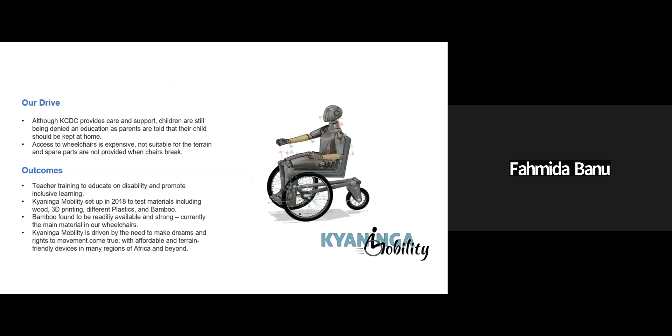But the wheelchair project, we hope to give throughout Uganda. So Kyaninga Mobility was set up, as I said, out of the real need for the equipment—we just couldn't get it. The stuff we got donated from abroad would normally be secondhand, very hard to get children's equipment.

It would quite often not fit, and we couldn't get the spares. So it was all very difficult. These are some of the chairs we've been working on, which I'm going to swap over in a minute, and we can go straight to see the chairs and the testing machines.

But we've tried where we can to get users that we can work with. It's quite difficult, because most of the children we work with have never had a wheelchair—they've spent the whole time on the floor. So we realized we weren't getting much useful feedback, because so many kids are just left on the floor. We've been giving some kids wheelchairs and they're like, yeah, it's the best wheelchair ever, it's brilliant—and you're like, well, probably not. So we've got a lot to work to.

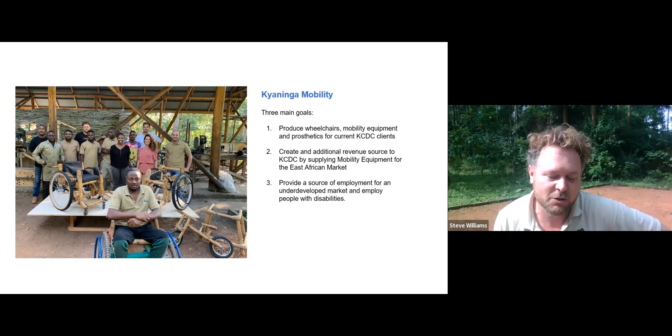So for now we're just moving back. We're going to make a few more adult versions because we've come across a really good network of users who do basketball, and they've got basketball chairs worth sort of $10,000—really good chairs. So it'd be good to compare ours to that standard. They're going to be coming down each month, we're going to put a competition on and use our chairs for the actual event, but also test all chairs with that network.

In the picture, there's actually one of our guys, Rogers. He lost the use of his legs through a disease he got in his spine, but he wanted to be a ballroom dancer again. So that was another great opportunity to have a user—it was really key to get the center of gravity perfect, all the spins, the durability. He's been a really good help.

We're working on, at the moment, trying to keep it just to 3 wheelchairs: a standard wheelchair, the ballroom dancing wheelchair—although I think they're looking at starting a Ugandan ballroom dancing team now—but it's the standard wheelchairs we really want to work on, and then develop until we have a range of around 10 or 12 wheelchairs. All of it is, we just want to keep developing. That's why we want to make them in country and not send them off to China. So we'd love to be able to make batch production here.

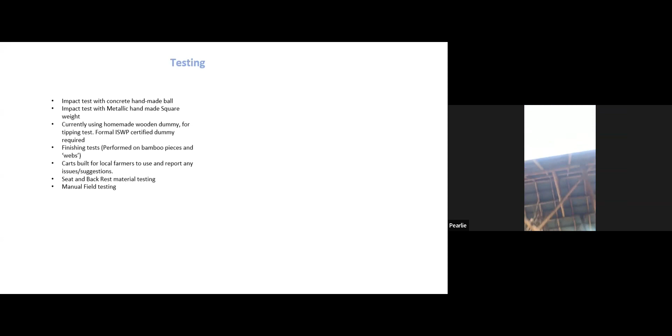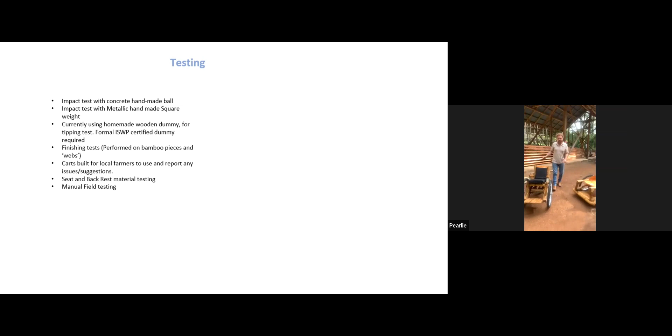Okay, can you hear us okay if I move back this far away? Yep, I can hear you.

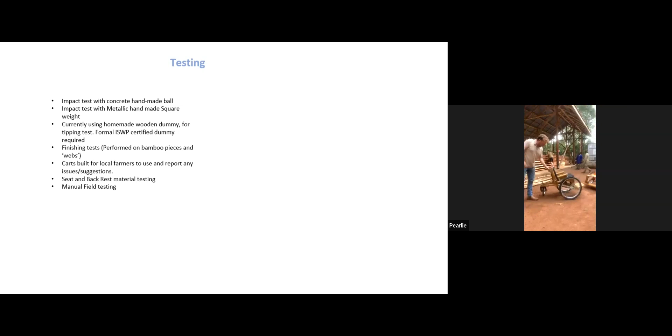Okay, great, so this is one of the chairs. This is more of the standard chair, but with a trike. As you can see, we're butchering all the chairs all the time.

We can actually move the caster wheels backs and forwards, and we can move the back wheels. We're trying to find the best center of gravity so it doesn't tip.

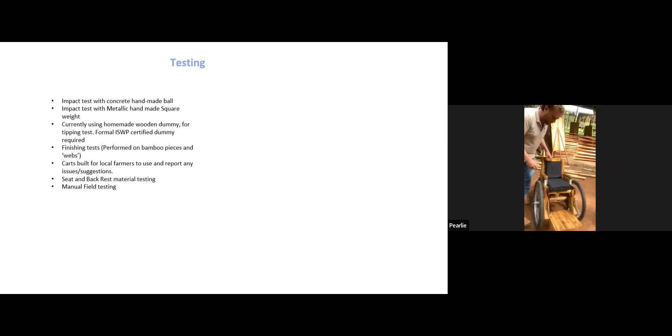This is for a child. Why is this so high up? It's for a particular child that had a very high waist. We've tried different strapping. I guess that's the problem throughout Africa.

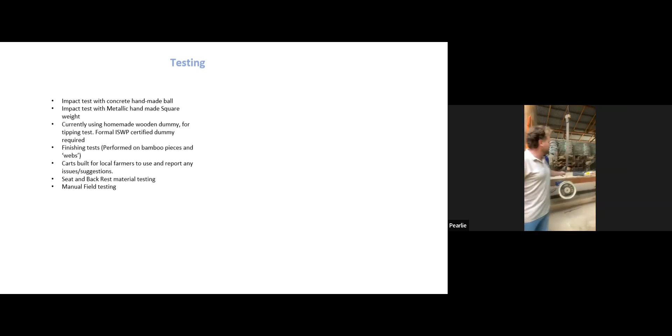We've tried all the different strapping, and to be honest, nothing works. We have it over here, where we leave it, and every week we measure the distance. Apart from, we've moved back now to seatbelt strapping.

The rest just keeps giving, basically one centimeter every week. All the strapping we can buy is given, so it becomes very, very saggy.

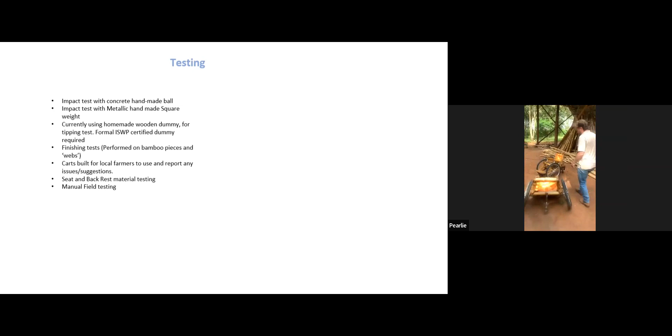This is the sports wheelchair. This is version 3 of this one. So...

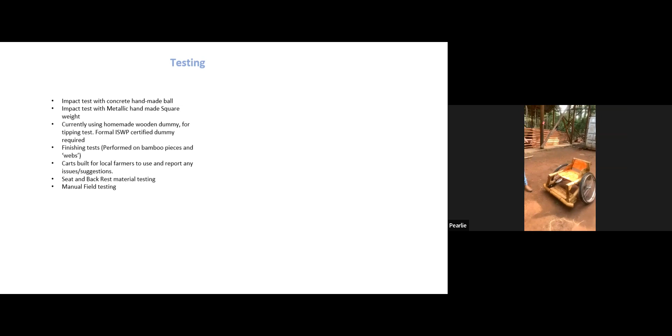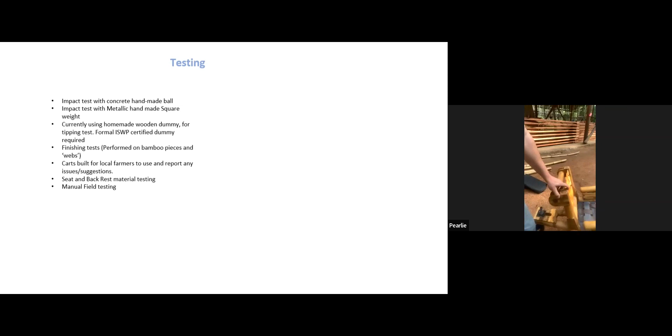Many things are changing, but essentially what we're very excited with these chairs is that the bamboo is incredibly cheap, and we found a way to fix the bamboo. That has been our mission really from the start, was how can we fix bamboo very cheaply.

We tried 3D printing for a year. We tried, obviously, metal brackets, but they were too heavy. We tried other plastics to join them. What we've done is we've created a machine to fill the bamboo with more bamboo.

And then a machine that shapes the core to go in, and then we can use traditional woodworking joints. So now we can do more like simple miters with the webbing. And that side of it seems to be going really well.

So we've done quite a bit of testing on dropping it, so if we can now start the real nitty gritty of getting, as I said, the center of gravity and everything else correct, we feel we can make much quicker progress. Should we have a quick look at some of the testing machines?

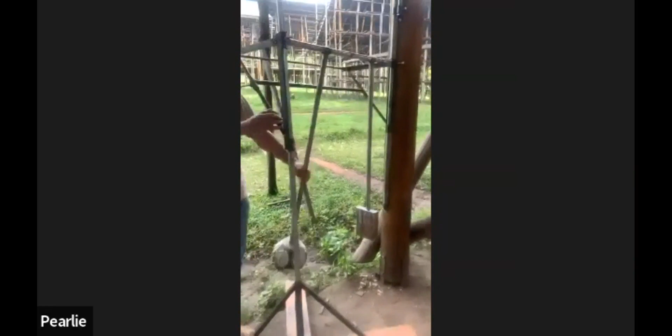So the two you've seen are probably going to get broken quite soon. We've set up so that we can, hopefully following Dr. Pearlman's approach, do the actual seat itself.

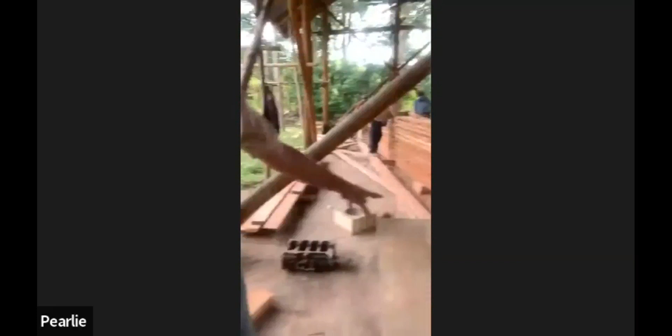Same with this one. These are all correct weights done from the ISO test that we got. This is for tipping, so there's a hoist that tips.

The trike obviously is the one that we're really worried about, getting the wheels so it doesn't tip sideways. This is our dummy. We put weights in, which we were given the design for, so that we can hopefully share data.

We then do trailer tests. So we take trailers that we fit on the back of the vehicles and then take them around town, so that we can basically, all the technology is the same as what we use for the wheelchairs and the walkers.

But we can see then how long the hubs last, how long the joints, the sprockets, the bearings last, so that everything gets a good test.

We've now given similar ones to guys in the village to use to take bananas and crops to market. We thought that was a really good bit of local testing, going over all the local potholes, getting it to market, unloading it. I think that's all the testing.

So what we wanted to ask was, what other tests should we be looking at? Should we be building something that we can sort of do in this country without importing very expensive machines?

Right. Does someone in the group have any insights for Steve?

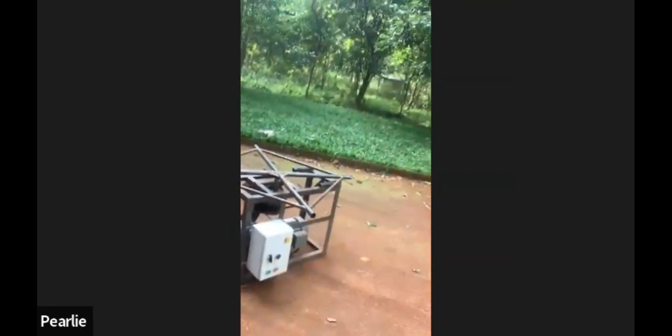I forgot to show you briefly, we have a carousel so we can pull wheelchairs around and around. We're going to make a course for it now. We just leave that running all day the workshop's running, and we'll clock its kilometers. So that was the one more machine.

Sorry to interrupt, do you have any plans for a fatigue test, like a drum test? How does that work? A fatigue test, like the drum test? Oh okay, we were looking at the drum test to test the casters.

Is there a drawing of that we can use to build it? There is, it's in the standard. Stephanie, I can get it to you if you can get it to Steve. Yeah, that would be great, thank you.

There have been alternatives to that. Usually the drums are steel, but I've seen some modifications where you can use a piece of plastic pipe and fill it with, I've seen some filled with concrete, some filled with dirt, just to get the inertia right on the drum.

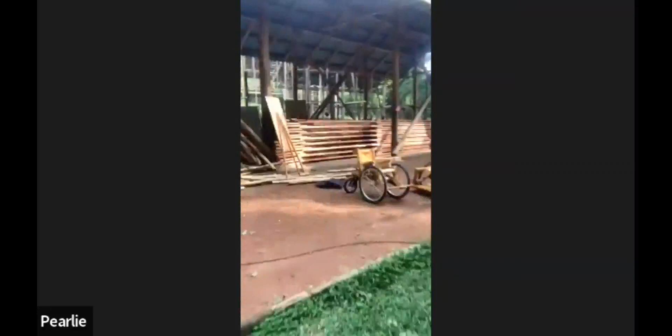Basically, a bike mechanic could repair everything. That's why we're really keen for the main structure to not break. That's why we're almost oversizing our components—let me just turn you around—we're oversizing the bamboo really, so these joints never break. This has to last for the life of the wheelchair.

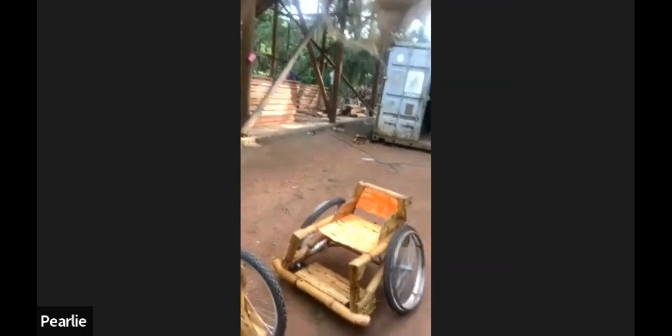And are you using some kind of covers, maybe with some type of fabric, to protect sharp edges for the user?

Like for the bamboo, it's all very soft, but we were thinking we're going to need some more guards on some of them. What we've really struggled with is getting 100% cotton - we're not going to be able to. At the moment we've been looking at buying even t-shirts. There's a lot of secondhand, I know it's not ideal, but a lot of secondhand t-shirts that are still in very good condition, 100% cotton, that might be a source, but we can't seem to find anybody supplying 100% cotton, which we need to stop anybody getting bed sores.

As part of the WHO basic training, when they do the cushion in low resource settings, what they tend to do is the fabric that's going to go on the cover of the cushion itself tends to be like active shirts - sports shirts. That's the kind of material they use with some cushioning inside, because that's going to be soft to the skin and allow them to breathe. I'm not a cushion expert, but that's what I know is being done in less resource settings. There may be other people on the call who can provide more feedback on what materials could be used for that - if someone knows more, please feel free to jump in.

One of our plans was, if we can get it comfortable with the strapping, to keep the foam as thin as possible but still comfortable, if we can get high enough density foam, which is very difficult. There's only 25 - what's the rating for foam? ILD. So we're trying to see if the manufacturers will go up to like the 75. We've asked many but haven't got positive feedback. So if we could go with thinner foam, we could put some behind the back seats and have at least one or two changeovers, so if they get wet they don't leave them damp - they change them over, then wash them in the evening and put them out to dry.

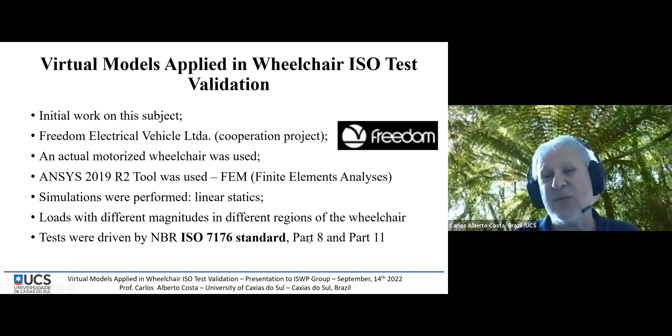I'll explain later. Loads of different magnitudes were applied, and we specifically used ISO 7176, part 8, for specific parts of the test. This was an initial test we did. We took the full geometry model of the wheelchair, turned it into a simplified model, and then a final model which we used to analyze.

It's important to say we removed all components that don't make a difference structurally. For example, we have the control here, so we didn't use this in the test, only the main frame of the wheelchair.

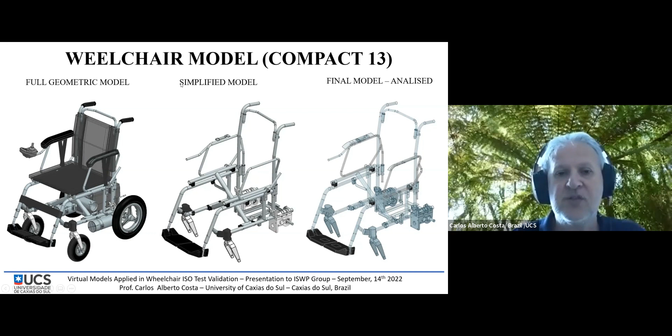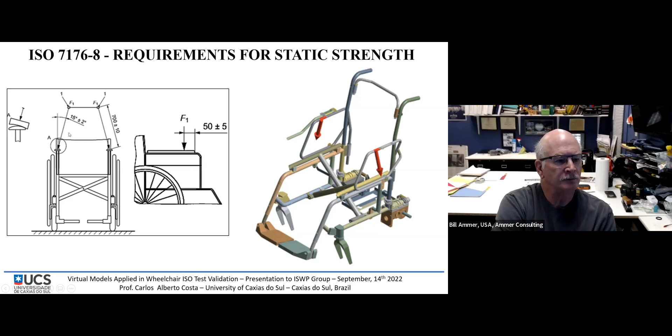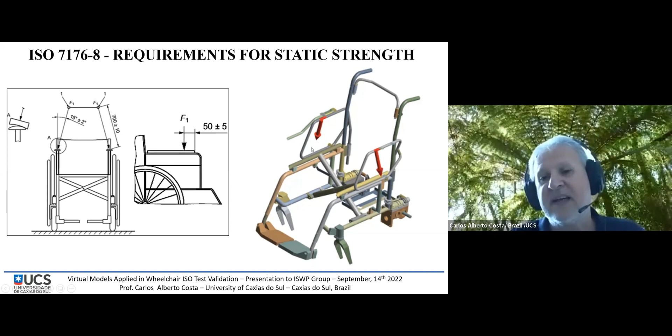We tested 3 situations. The first was about the armrests, where we applied the loads specifically as the standard says. Here on the right side we have the virtual model. We also tested the footrests, applying the force there too. In this last one, the standard talks about the adherence of the handles, but in this case we tested how the wheelchair structure behaves when pulling the wheelchair up to the sidewalk, and how the structure responds to that. So we didn't actually check the adherence of the handles.

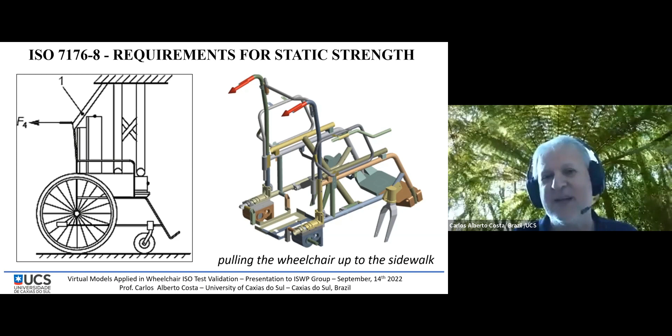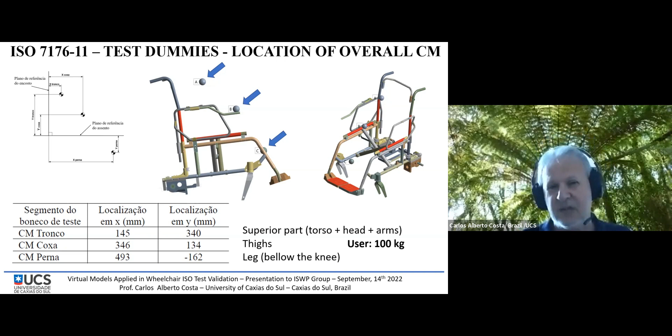To do the test, we also considered part 11, which states about the dummies. We considered the center mass of the superior part of the body, then the thighs, and below the knees, the whole leg. So we considered a user of 100 kilos to do the test. The wheelchair is about 120 kilos, but we considered 100 kilos and made all the calculations with this.

So after doing the finite element mesh, we made all the connections. Here comes one important thing: how we design in the virtual model the connections of the wheelchair parts, like welded connections, bolted connections, the tolerance, the clearance. We have to keep in mind that the virtual model is quite, let's say, perfect. So when you test a wheelchair in real equipment and put a load or force at one specific point, the wheelchair absorbs this force in another part of the structure.

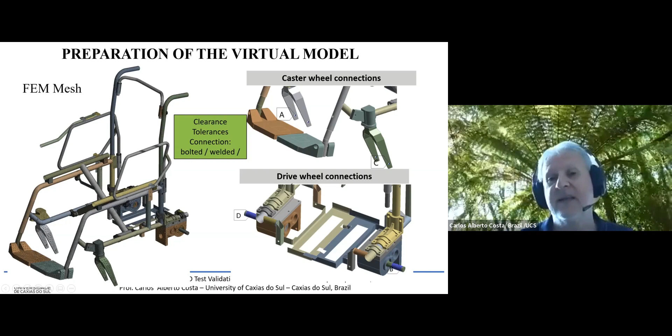But when you do this in a finite element analysis model, it's quite specific, so it considers that the rest of the wheelchair stays rigid. So this part is important to keep in mind, because eventually you can get a different result. So we have all the connections, the caster wheel, the drive wheel, how we fixed the model.

And then presenting the conditions. So the first condition, just to show: we consider the user seated, and all the weight of the seater is distributed by these two bars, where the actual seat is.

For this wheelchair, it is manufactured with steel SAE 1008, cold rolled. And from this we took the tensile strength out. This is the part where I told you we have considered only this part of the material property. We call this part elastic.

So we didn't put the second part in the software, which is the plastic part, where the actual deformation of the material occurs. We call this the plastic part. So we had to put in a hyper-elastic part, which is a little more complex. And all the data is in megapascal.

There is a mistake here, it's a capital P. So for the user seated, it's quite easy. All the maximum tensile values in the distribution of the wheelchair, no big deal about this.

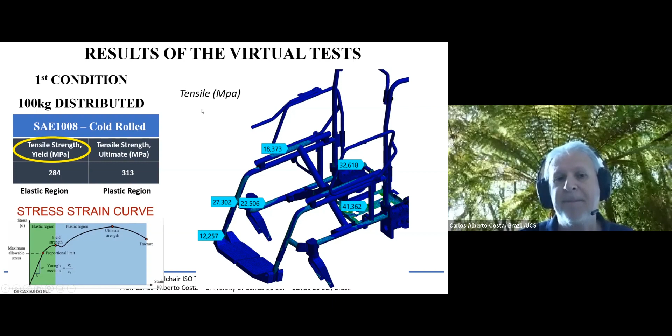The third condition: we put the loads on the footrest. At first the results seemed quite strange. But then the manufacturer told us they are using two different materials here.

The SAE 1008 cold rolled in the superior part, and the inferior part was another SAE 1008, drawn, which changed the property values. So in this case we saw that it was quite critical.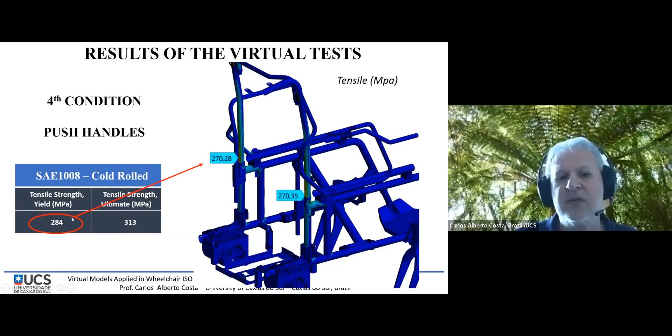In order to check some of these results - because okay, I have a virtual model, does it make sense or not - we exchanged a lot of information with the manufacturer, because they had tested this wheelchair at an official test center, but they didn't get results by numbers, only pass or no pass in the test.

So we put some instruments here, and we used a strain gauge to get the values of the deformation and the tension. And we did a test with some calibrated loads.

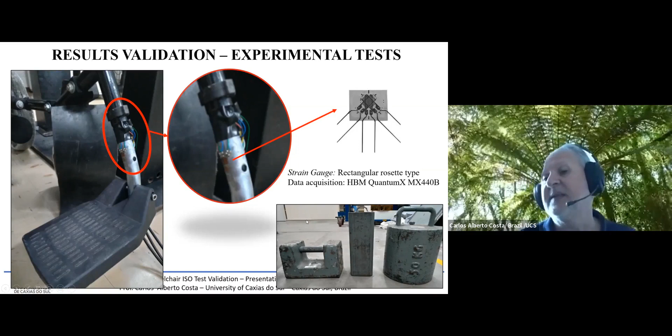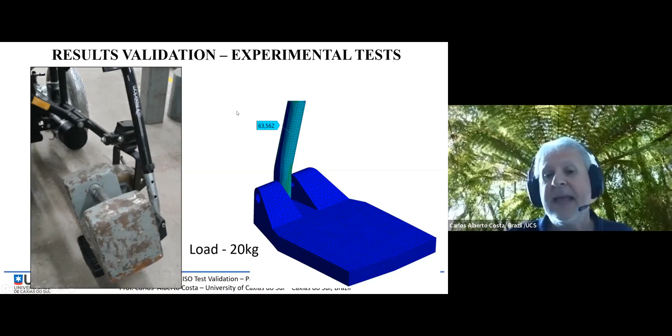So we used here, but of course we put a little thing that doesn't appear here to simulate exactly the same condition that the standard says, and the same that we used in the virtual model. So for 20 kilos, for example, we got 63 megapascal.

Tensile. And then we did a comparison with the experimental tests and the virtual tests and got some results of the deviation, which is not bad when we consider this is the first model, considering a little of things that were not perfectly informed to us.

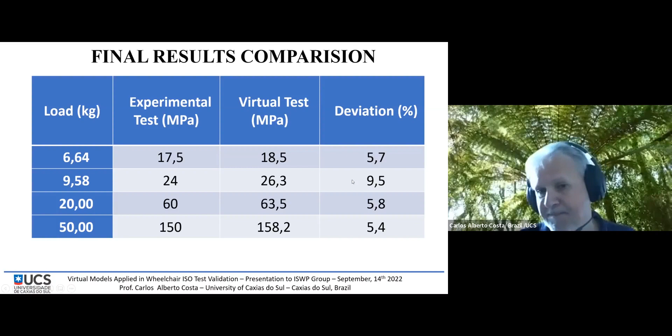But anyway, when you have a deviation about 10%, I'm not saying that's okay, but it's quite good for a general model. So we tested this, and just concluding this first work that we have done, it's a good and reliable solution. It's not bad. In fact, we have an idea like in the automotive industry, we can test physically and calibrate the virtual model for some sections of the wheelchair. And then when you change some part of the wheelchair, there is no need to test all the wheelchair again. You can only adapt that part in the model and see how it behaves.

So the main issues related to the material specifications, this is one part where we have a problem: what exactly is the specification of the material? What exactly are the mechanical properties? We were not convinced about the mechanical properties, so we asked the manufacturer if they could make some destruction tests on one part of the wheelchair. We took it apart and made a traction test, an elongation test, to see if the tensile strength was the same that the manufacturer was telling us. So you have to prove if it was. It was okay, the difference was about 10 megapascal. It was okay. But also we can extend these to other physical tests: tensile, impact, fatigue tests. And this is the information that you can input into the virtual model and try to simulate other situations.

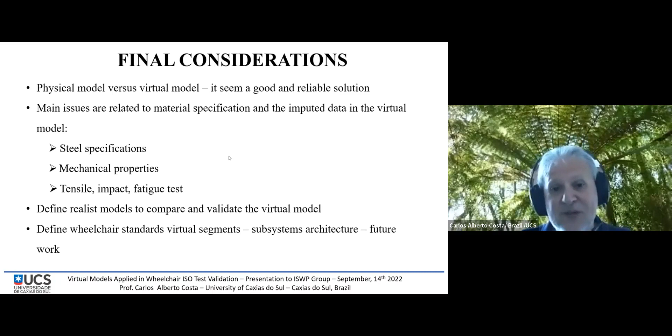This part of the realistic models is the main issue, in my opinion. We have to always, although I'm doing a virtual test, check and calibrate the model. So I cannot just do the virtual model and say that's correct. But as the tests are done, we are getting some confidence in the virtual model, so you don't need to do all the physical tests again. And as I told you, one idea we have is creating an architecture that defines subsystems of the wheelchair. And once you have the confirmation that this part is okay, you don't need to always test the whole wheelchair again. You only test the parts that you are changing in that configuration, because the other ones are already, let's say, tested and validated. So the work, sorry for my English, but the work in essence is this.

It's quite different from what the group has been presenting, but I'm ready to listen to some considerations or questions to try to answer.

Carlos, how long did it take you to do the actual modeling of the wheelchair?

It was easy for us, because, let me explain why. We received the full geometric model, the virtual model from the company, because the company has to design the product, so they have all the details designed. So we received that. Our main work was to take parts we were not considering for the test, and mainly work on the joints, how to configure the joints, because you have to be very specific on this, otherwise you can get big errors in the model. But to be more objective, this student took this work, decided to do it, and did it in about two and a half months. He knows about finite element analysis, he's an engineer from this area.

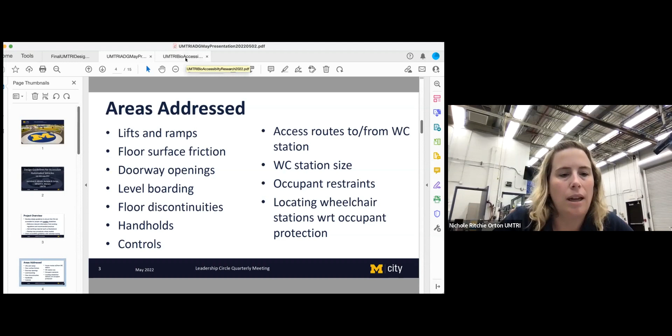A report on that's coming out soon through M-City. We're also developing a side impact procedure through NHTSA's funding - that's the National Highway Traffic Safety Administration. But the bread and butter of what we do every day is testing frontal impact for different types of products.

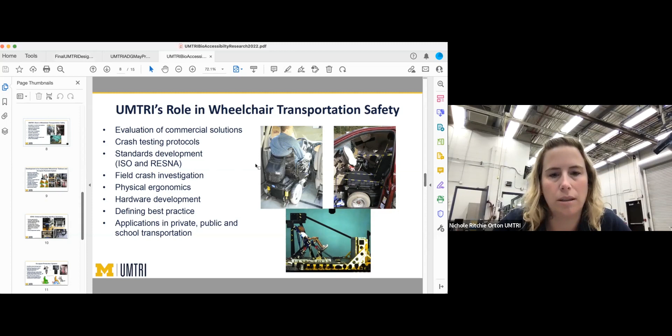Let me switch my share real quick and go to this. Miriam Manary, myself, and Kathy Klinich are all the main researchers in this area. Miriam and myself are both involved in the RESNA Committee on Wheelchairs and Transportation, or COWHAT, and the sister committee in ISO, ISO WG6, which develops standards related to using your wheelchair inside a vehicle, as a seat inside a motor vehicle.

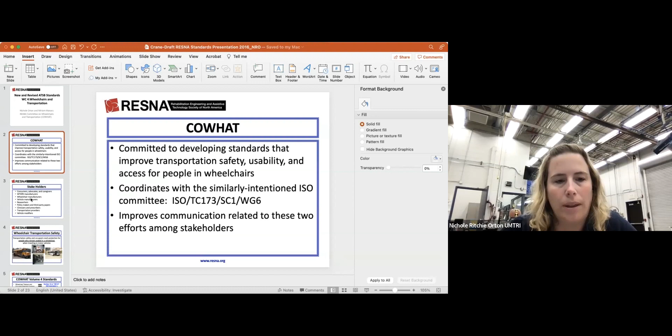These groups are made up of engineers like myself, consumers, advocates, caregivers, manufacturers of the different products - like the tie downs and occupant restraint systems, the wheelchairs themselves, the seating, vehicle manufacturers, and clinicians. We even had some policymakers provide input, like from FDA.

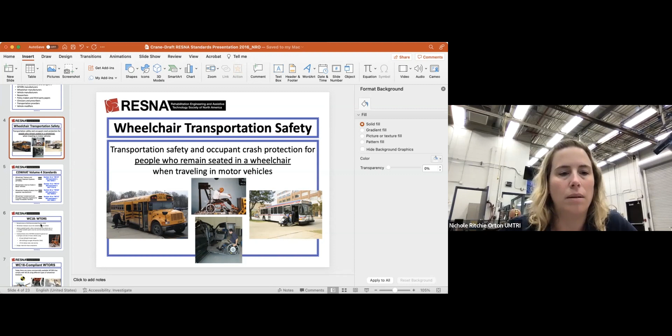Our main concern is to look at crash protection for people who must remain seated in their wheelchair, and make sure that they're achieving at least the same level of safety as a person seated in the manufacturer vehicle seat. So the standards at play in this arena are related to these products.

We've got WTORS, which are the tie downs and occupant restraint systems. So we've got WC18 here in the US as a RESNA standard, and the ISO world equivalent is 10542-1. There are some differences, but we do try to harmonize as much as possible.

Then for the wheelchairs themselves, to make sure the wheelchair is crash worthy, we have WC19, which is part 19, as Jim was mentioning earlier, 7176 part 19. And then for the seating systems that we want to test independently of a wheelchair frame, we're able to test using the methods in WC20 or ISO 16840-4.

The last category is for a low G environment, or a large accessible vehicle environment, where we're looking more at a containment system as opposed to a restraining system - for big buses and things where you're not going to have as high forces. That's section WC10 for RESNA, or 10865-1 in the ISO arena.

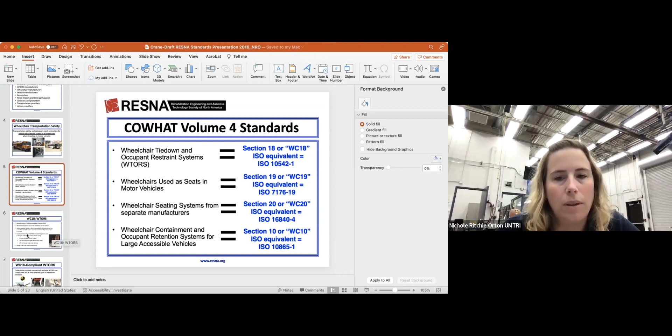So I'm going to show you some of the things we do for the top three mainly here. For WC18, that's where we're testing tie down systems and occupant restraint systems. The standard includes many things, like labeling considerations and design requirements - it's got a bunch of design requirements for the tie downs and the occupant restraints.

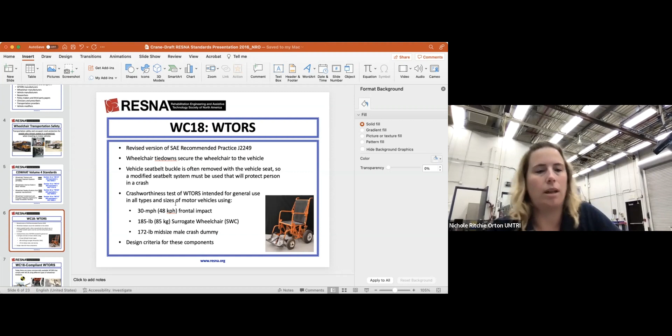But then in Annex A, it's got the crash test, which is a 30 mile per hour or 48 kph frontal impact, where we use a surrogate wheelchair that's 85 kilograms and typically a mid-sized male Hybrid III crash dummy. I can come over here and show you - I think Jim showed some of these as well when he did his presentation, but this is our surrogate wheelchair.

So it's basically just a rigid reusable tool so that we can test our different tie downs. We can do both docking type systems or strap type tie downs, because we've got securement points here.

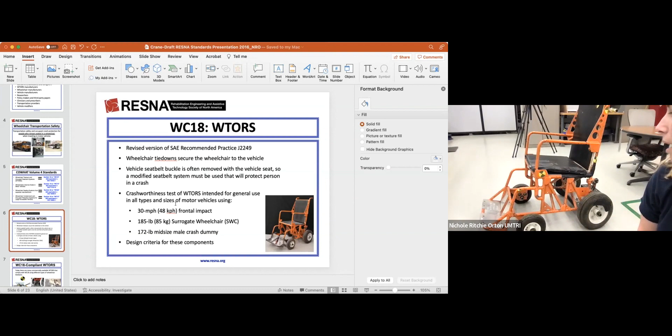We can test with a belt anchored right to the wheelchair, or with systems that come with belts anchored to the floor. WC18 actually requires, if you have a kit for general use that includes an occupant restraint system anchored to the floor, there's a second test now required, because WC19 wheelchairs are in the market, which can have integrated seat belts attached to the wheelchair, so all the restraint forces are attached to the wheelchair. So the second test of the tie downs would include the wheelchair, with a surrogate lap belt anchored to the wheelchair, just to see how the tie downs can handle those forces.

Does anybody have questions? No. Okay, so then let's see what else.

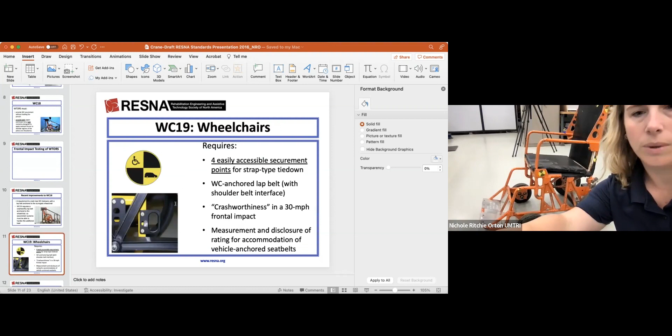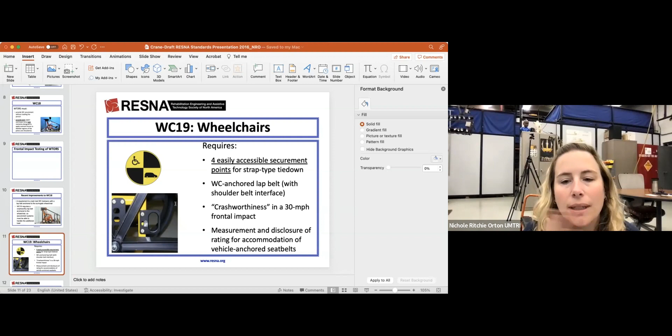So WC19 is where we're doing our testing on the actual wheelchairs that are meant to be used as a seat in a motor vehicle. For those, it's a similar test: a 30 mile per hour frontal impact on our sled here.

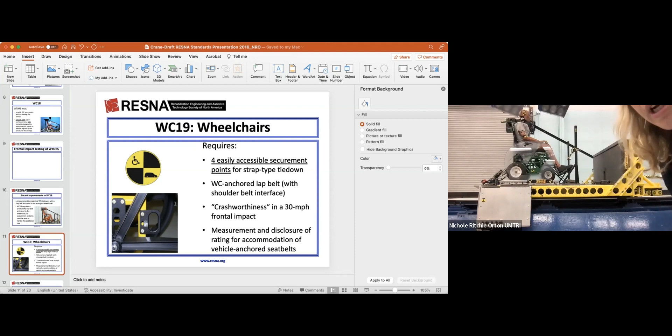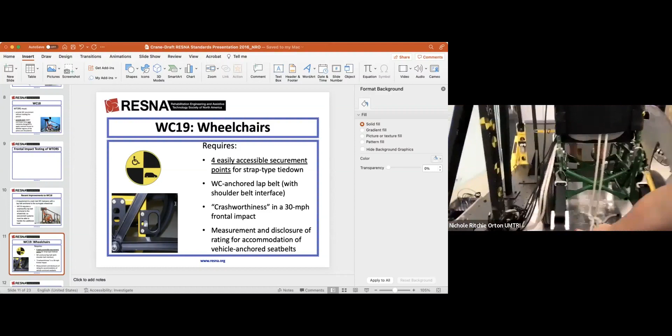For that, we are strapping down the wheelchair with our surrogate tie down system. For WC19, we have a very prescribed set of surrogate tie downs made of reusable components, so we can replace webbing and things like that. We've got a strain gauged anchorage here, rod end at the bottom, so we can measure the forces on the rear tie downs. For each test, we replace the webbing. We've got these split drums that enable us to fix the tie down at a specific length, and reusable hooks for ours. The ISO standard part 19 will allow you to use commercial tie downs for this, as long as they are crash worthy as well.

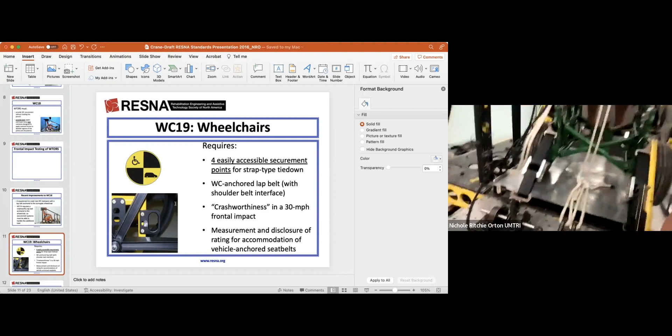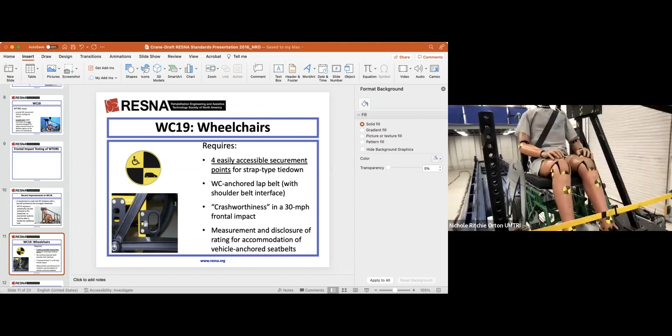But this is what we use, and we typically also use a surrogate shoulder belt paired with a commercial wheelchair anchored lap belt. And we have this knee leg stopper here to keep the knees from hyperextending during the crash, which is in both standards now.

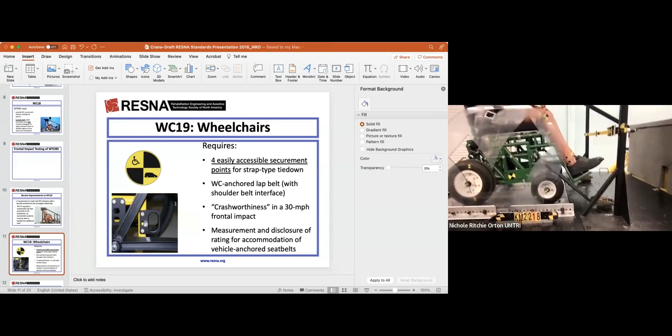When we do these tests, we're looking for things like how far forward does the wheelchair and the occupant move, and the structural integrity of the wheelchair itself. Do we have any major breaks in the frame? Does anything break off and go flying? Because there's limits on those things. Whether or not anything breaks and creates a sharp edge that the occupant can contact, and so on.

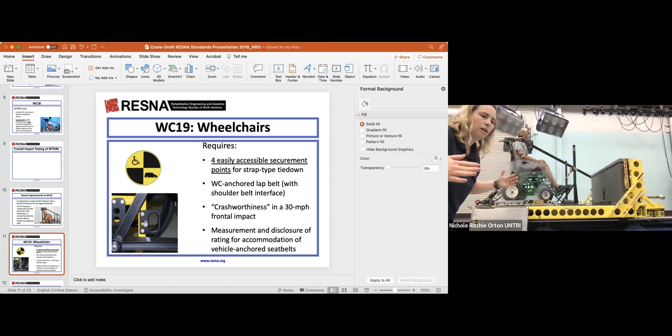We also have this little zone here, this plexiglass zone, that's in the standard. We're requiring that wheelchairs have their securement points within this check mark zone, which is a zone we developed based on the minimum and maximum reaches of different tie down lengths for a strap type tie down. So we want to make sure that any securement points on the wheelchair are reachable by a typical set of tie downs, and that they can tension properly.

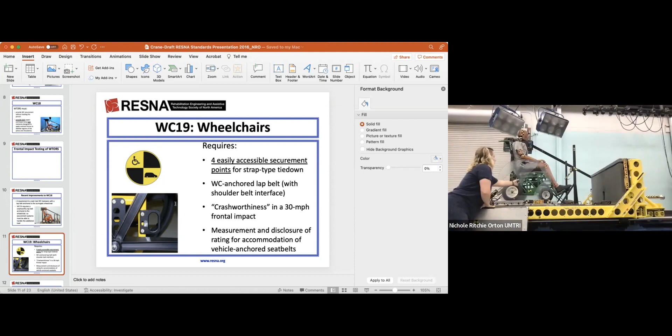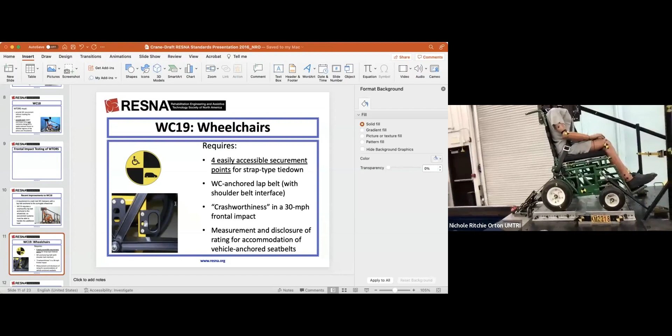So then for WC20, where we're doing the seating systems that are independent from a frame, we use this chair here. This is the green, our surrogate wheelchair frame. It's a rigid frame that we validated against several commercial frames to provide a worst case loading situation to the seating system and its hardware.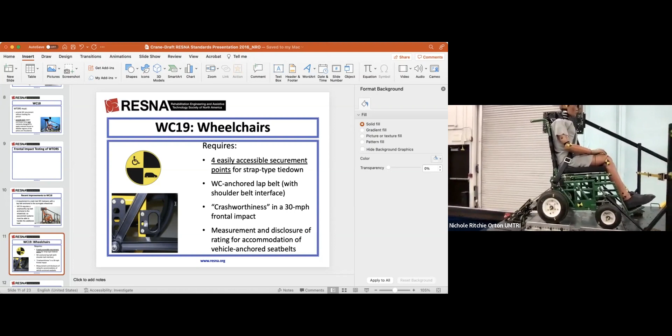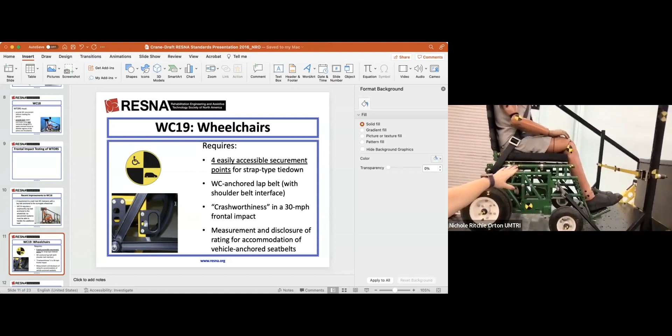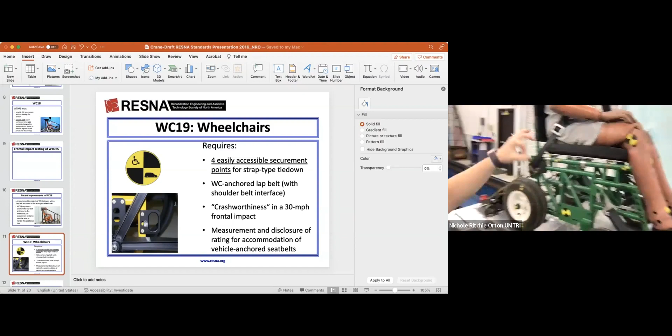So it's tested with the surrogate tie downs as well, and then we use a commercial seating system and their own attachment methods. This frame can be at different widths. We've got different cross members that can create different widths of wheelchair for the frame, and different seat rail dimensions. So if we need a wider or a square tube instead of a circular tube, or a larger diameter tube, we can swap those out. We don't typically do that because most of the seating systems can fit on a 1-inch diameter rail like this.

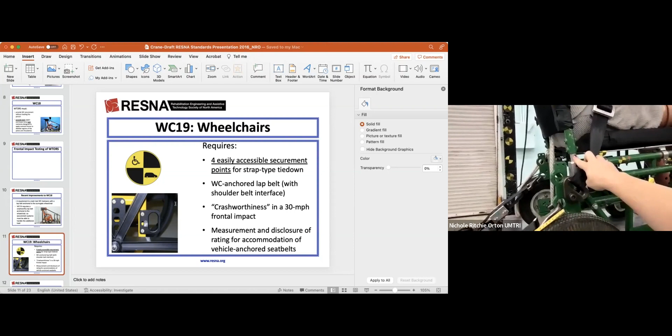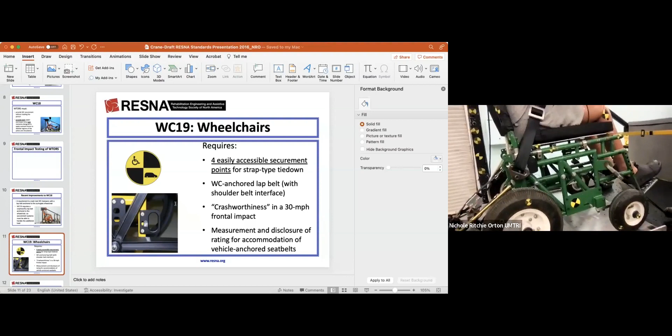We have deformable elements on this. We've got this aluminum caster attachment here - I don't know if you guys can see it, but you can kind of see it on the other one. These deform with each test to manage some of the energy and make it more similar to a frame with its deformation, so it's not just such a hard, rigid system. We also have deformable aluminum elements for the seat back canes here that will bend and give some, because we know most wheelchair seat back canes will give some for a real wheelchair. But these are a controlled and repeatable way of managing energy in a realistic way for this crash as well, which is also 30 miles per hour.

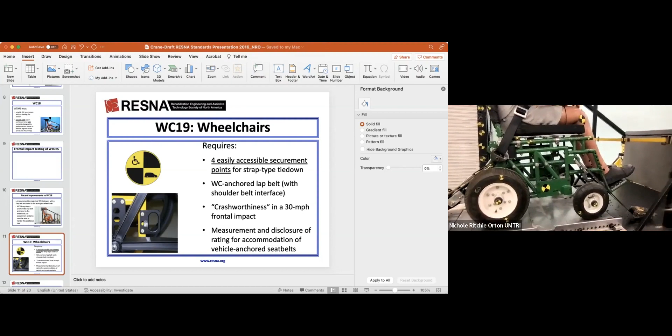Let's see what else. Does anybody have questions so far?

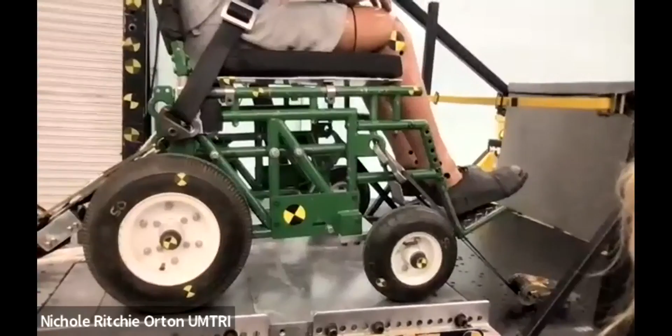So our sled here is a rebound sled. It's a bit old, an older model, but it's 45 feet here. It starts at this end, and it's got a pneumatic piston in between which launches or accelerates the sled on the rails. Then it will achieve about 17 miles per hour coming into this nitrogen air spring at the end, and it's bounced back at 13 miles per hour or so to achieve the total delta V of 30 miles per hour.

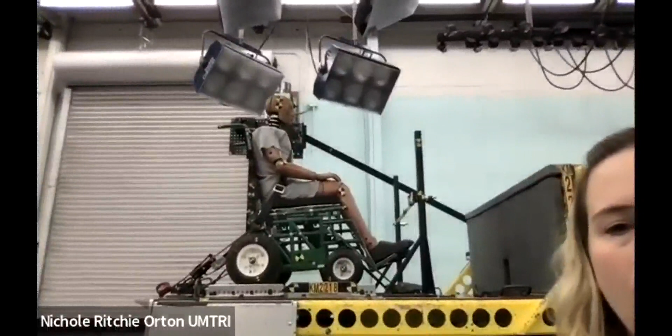What else? So this is the mid-size male dummy that we use. We always run with head and chest accelerometers in there, even though right now the standards don't have any requirements related to injury measures based on the data, just because we don't know what kind of injury limits or risk values we have for people who have less muscular tone and probably less bone density, things like that.

Yeah, that's the mid-sized male. We've got a large male ATD setup over here.

For this test, we use just a surrogate hook like this. We have somebody with a timer, and we go ahead and attach to all the different securement points on the wheelchair. We rarely have, we've never had anybody fail this test because you have 10 seconds to attach or detach each hook. But it really gives us an idea of the difficulty level. If you've got something interfering with the opening of the securement point, you'll see it in this test and it'll be noted.

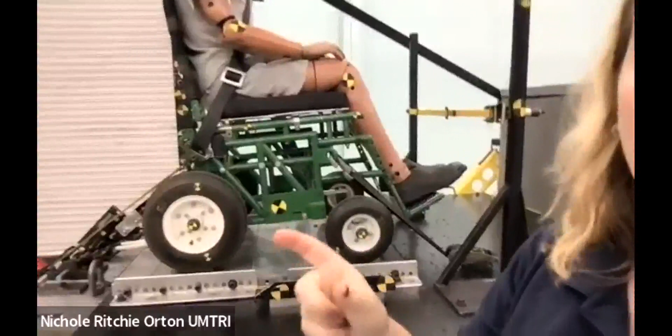What else? We also do a tilt test, so we check lateral stability of the wheelchair for WC19. That's actually done on our sled platform here. We put these big hinges on right here and lift the entire sled plate up to 45 degrees and measure how much lateral movement the wheelchair makes at the seat junction. There are zones: a good amount of lateral excursion is 0 to 20 millimeters, acceptable is 20 to 40, and 40 plus is poor. So we just want to have an idea of what kind of stability the wheelchair will provide.

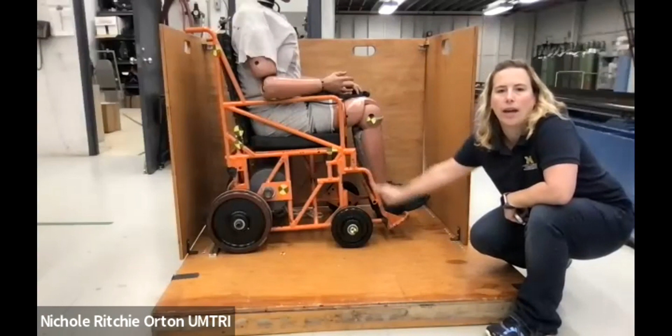The other tests that we do: we will attach tie downs on this platform and measure whether or not the strap deviates from a straight line path to the anchorage point on the floor. It can't deviate more than 40 millimeters from a straight line. We check whether or not there are any sharp edges on the wheelchair within 50 millimeters of the tie down webbing, like the center of the tie down webbing. There can't be any sharp edges, which is defined as a radius of 2 millimeters or less.

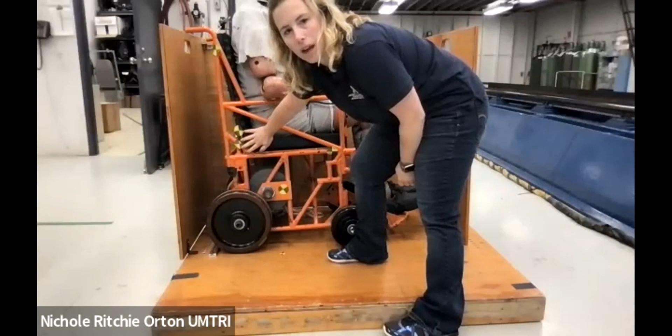Then we put on a seat belt, a wheelchair anchored lap and shoulder belt, and check to make sure that with the belt anchored to the floor, there are no sharp edges on the wheelchair that could potentially contact and cut the belt webbing. We make sure there are no structures on the wheelchair that hold the seat belt away from the hips and the shoulder, because that would decrease the safety.

What else do we look at? We make sure you're getting good wrapping on the body.

I think those are the basics in the standard. There's a lot encompassed in the standards that we don't test here because it is a voluntary test. A lot of the manufacturers will do their own in-house verifications on things like labeling and design requirements. We've got stuff for user manual instructions and installer instructions in the standards, and they're kind of on their own with those things.

Here are some of the other dummies we use, our hybrid 3 dummies. Does anybody have any questions?

So, Nikki, I've got to ask you a question, and you're all waiting for it. I know, I saw you. No, this is a straightforward one.

On the 16840 surrogate test, I noticed that section 20 has, is it a standard requirement for an integrated lap belt or wheelchair anchored lap belt on the surrogate wheelchair? It is. So, go ahead. Do you ever conduct tests with vehicle anchored? We do not, unless it's requested.